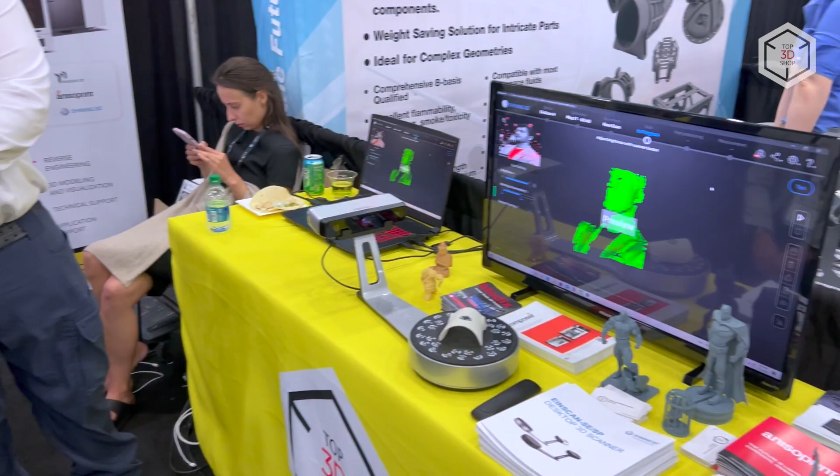One of the key features of the 3D scanner, namely its hybrid structured light source, allows reducing the intensity of visible light emission, which makes rendering a human face more comfortable for the person being scanned. The infrared non-visible light, in turn, greatly improves capturing of hair and dark colored objects.

The EinScan H is equipped with a color camera which allows for full-color texture capturing.

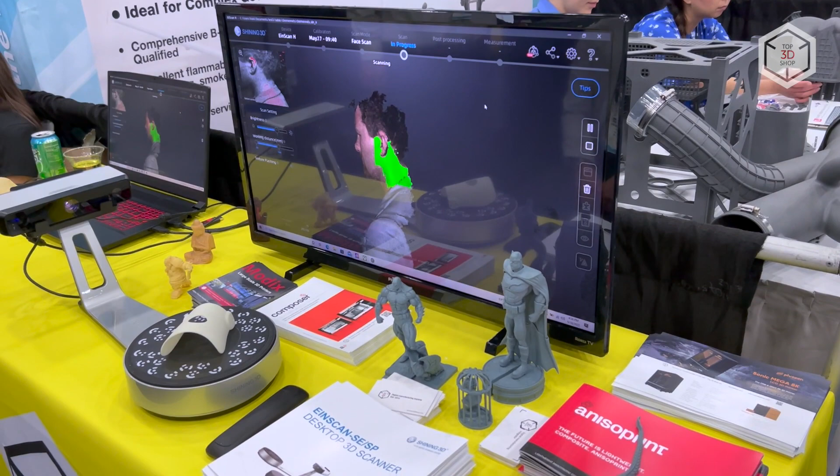The scanning accuracy of the device depends on the mode and ranges from 5 to 6 hundredths of a millimeter, with a point distance from 25 hundredths to 3 millimeters. The volumetric accuracy stands within 1/10 of a millimeter per meter.

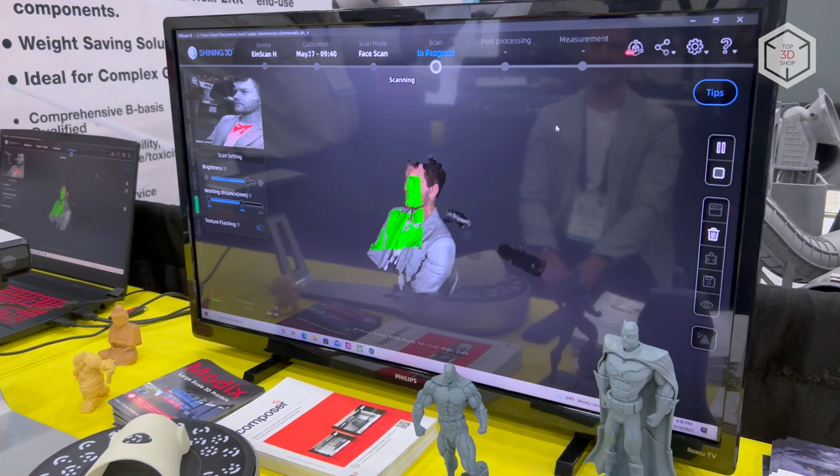The EinScan H operates with a scanning speed of 1,200,000 points per second in visible spectrum scanning, the speed being reduced to 720,000 points when using infrared light. The align speed in both cases is 20 frames per second.

The maximum scan volume and depth of field on the EinScan H also depend on the operating mode. In the standard mode, the scan volume is 420 by 440 millimeters, with the depth of field ranging from 200 to 700 millimeters.

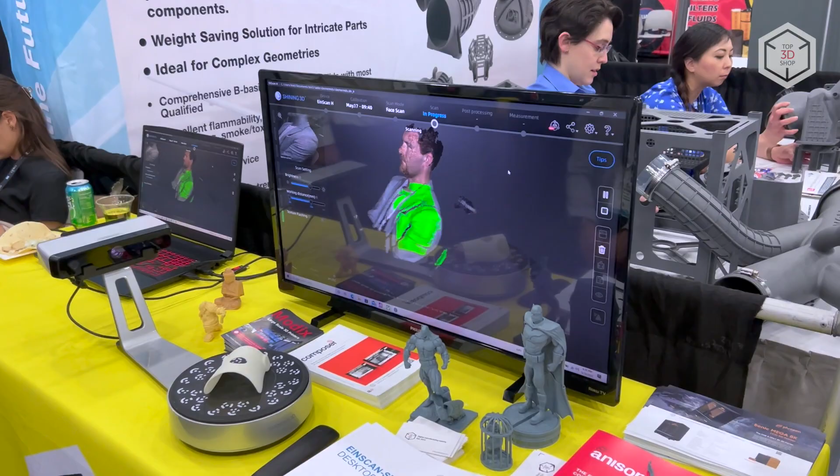In the face scan mode, the volume increases up to 780 by 900 millimeters, with the depth of field from 200 to 1,500 millimeters.

The EinScan H is a lightweight, easy-to-use device that weighs just over 700 grams. Its form factor is traditional for a handheld scanner. The top module of the device houses a block of control buttons with LED indicators showing the scan distance, and the power button is just below.

A wired USB 3.0 connection is used for data transfer from the device to the computer.

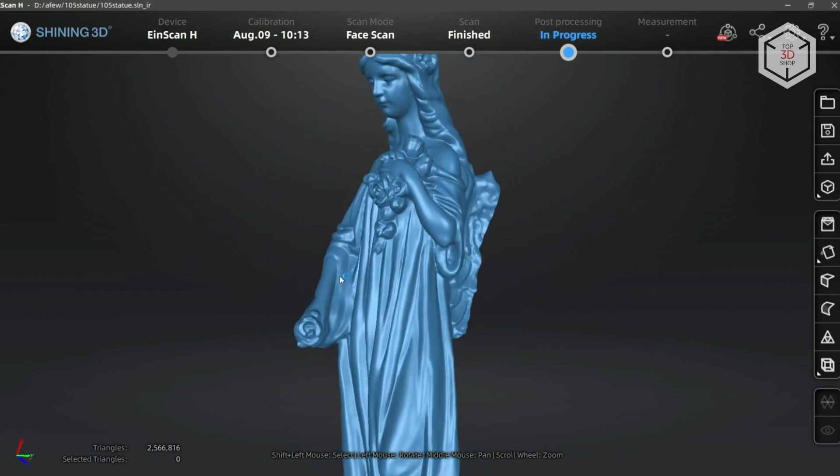The EinScan H comes with the proprietary EXScan software, which lets the user configure and calibrate the 3D scanner, supports all the modes, and allows editing and converting the rendered models to the most common file formats: OBJ, STL, PLY, P3, and 3MF. This is Top 3D Shop with the Shining 3D EinScan H handheld 3D scanner overview.